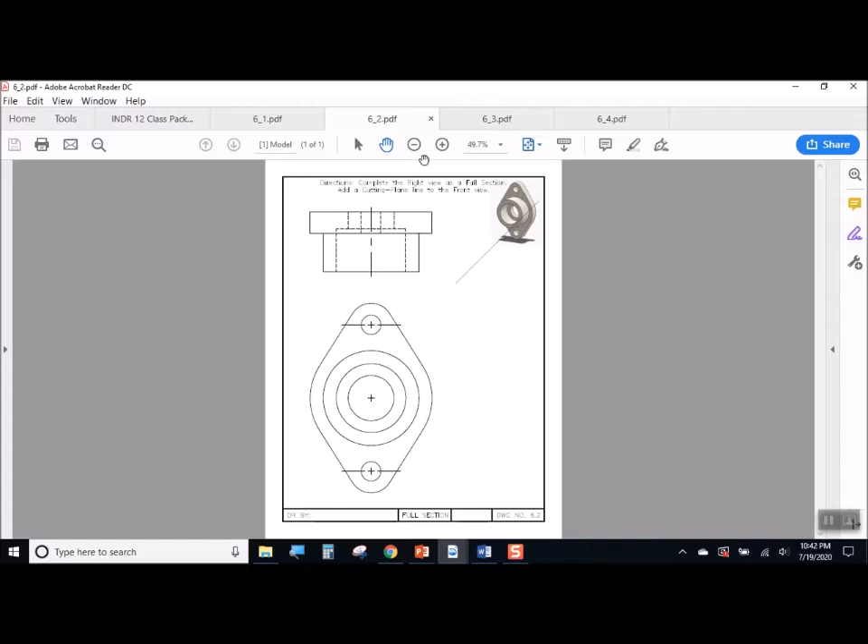So you take a look, here's our little 3D model in the corner. Here is the front view of this object. Here is the top view of the object. Here is a miter line to help you out. You're going to be projecting some lines from the front view over to the right. And you'll be projecting some lines from the top view over and down.

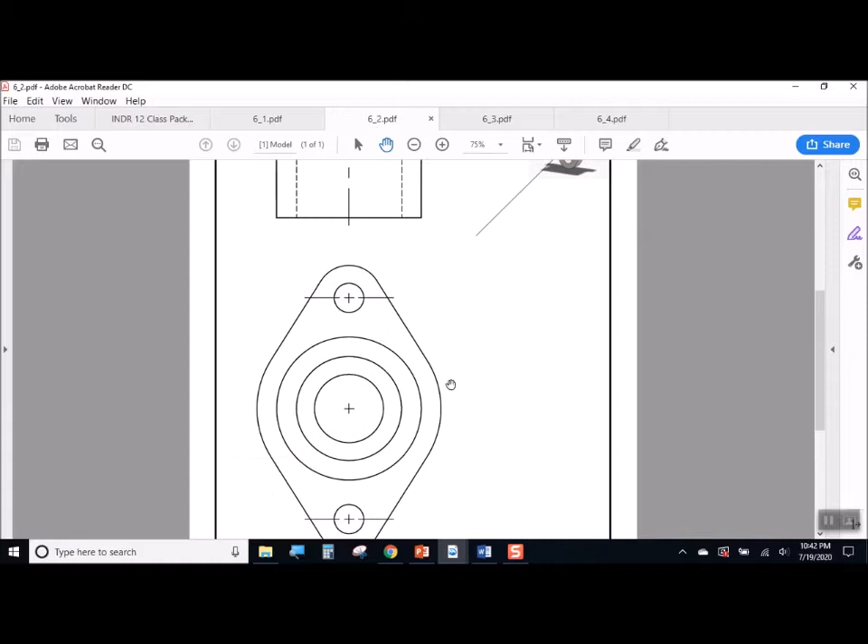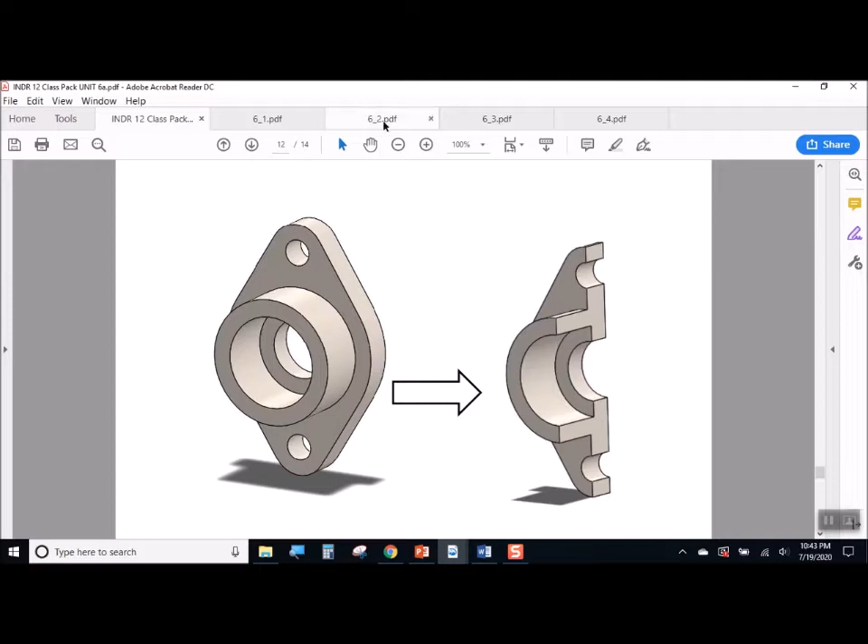Now, just as a caution to you, please don't project every single quadrant on every single circle and arc to the right. If you do that as your first step, you're going to wind up with a giant checkerboard over here. You're going to make a giant mess. So what you want to do is be selective. Think about the overall shape, the rough shape of what this thing looks like, and project over only the points that will give you that rough shape, the overall height.

And then this part here is a bump out, right? It's like a pipe that's been welded on to that teardrop shaped flange. Well, project the top of the pipe and the bottom of the pipe out, along with the top and the bottom of that base plate. Okay, when you get the basic shape of this object,

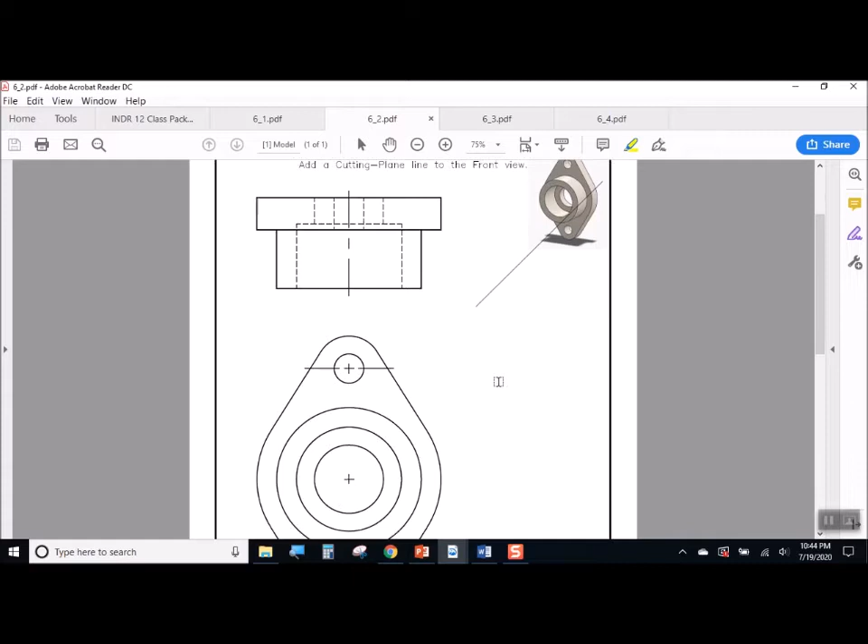you're in a much better position to start bringing over some of the details, like the holes going through the thin part, and the hole going into the pipe. And then we see there's a smaller hole in the back there going through that thinner part. Make sure all the corners in this top view get projected over and down so you know how deep the elements in that side view are going to be.

So the one thing we don't have is a cutting plane line. Make sure you add a cutting plane line and draw it correctly. Dark, dark, dark, heavy line using the pattern. 90-degree bends at the end and pointing in the direction that we're going to be looking after the imaginary cut is performed.

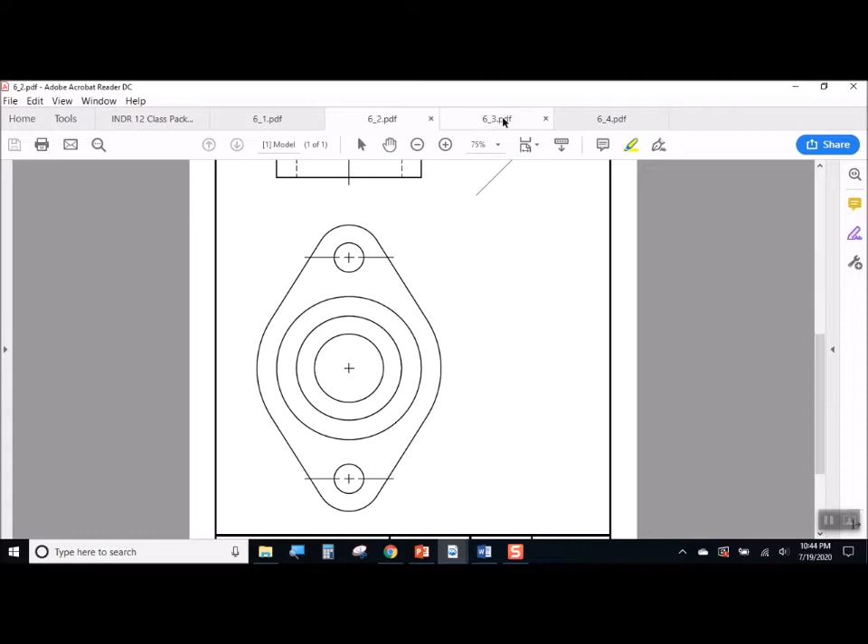Drawing 6.3 is a half section. We've got a cylindrical tube formed as part of this flange plate here. It's all one part though. The hole going through here, we see it's a small hole in the top, then it gets wider. So it's two different diameters. A big diameter just below the top surface, small diameter coming out of the pipe, and then here's our flange with these bolt holes going through it.

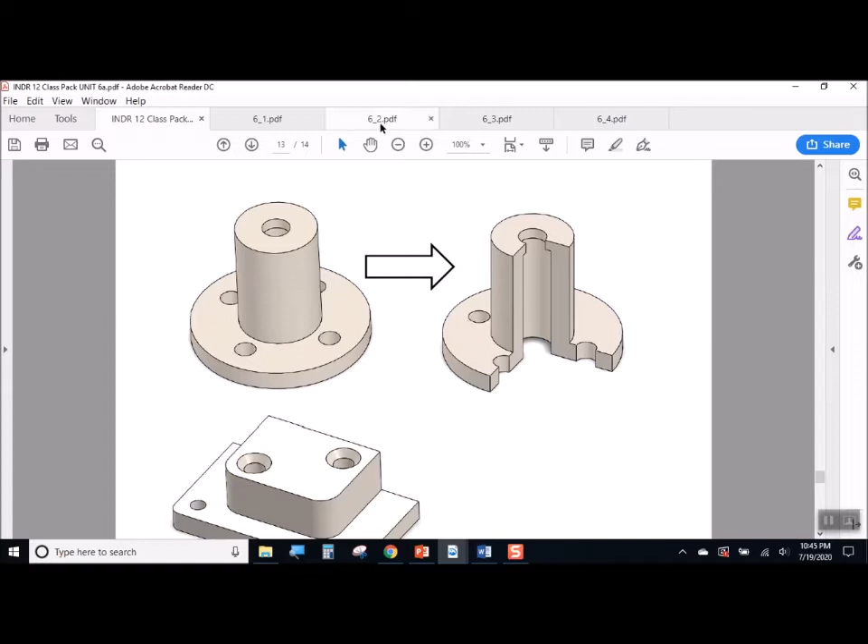So the idea is I want to create a half section. So to create that, you're going to be projecting over from the top down. You'll be projecting from the side over. And then keep in mind, only half of the view will be in section. The other half will just be what it looks like on the outside. There are hidden lines over here. There's nothing wrong with them over here, but remember, hidden lines do not go on a section drawing.

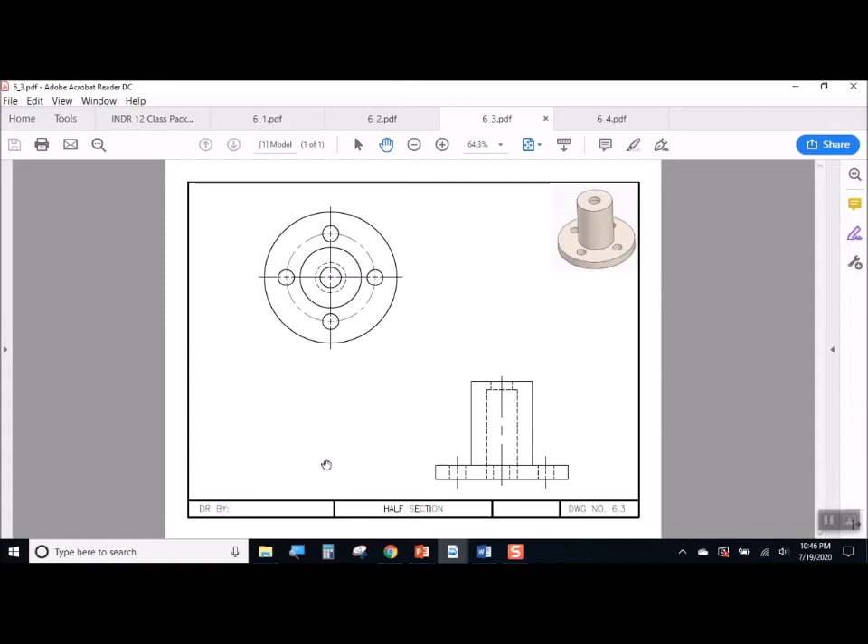Here's our drawing 6.4. It is an offset section. There are two countersunk holes and then two straight through holes. And the idea is I want to draw a front view that shows this part as an offset section. So again, there's a lot of stuff happening here. Rather than bringing down every quadrant on every circle, in every corner, just bring over the main points, the principal corners that will give you the overall shape of this thing. Bring them down from the top, bring them over from the right, and then rough in the shape of that front view.

When you've got it all roughed in, then you can start bringing down the holes and the countersinks, and then the through hole that goes with the countersink. And countersink just means a hole with a little bevel at the top, a chamfer at the top. So if you look over here, this is what they look like when they're drawn with hidden lines. When you make yours, they will look exactly like this, except they won't be hidden. They'll be with solid lines. Okay, but same 45-degree angle, same depth, just bring the points over, and then you can't go wrong.

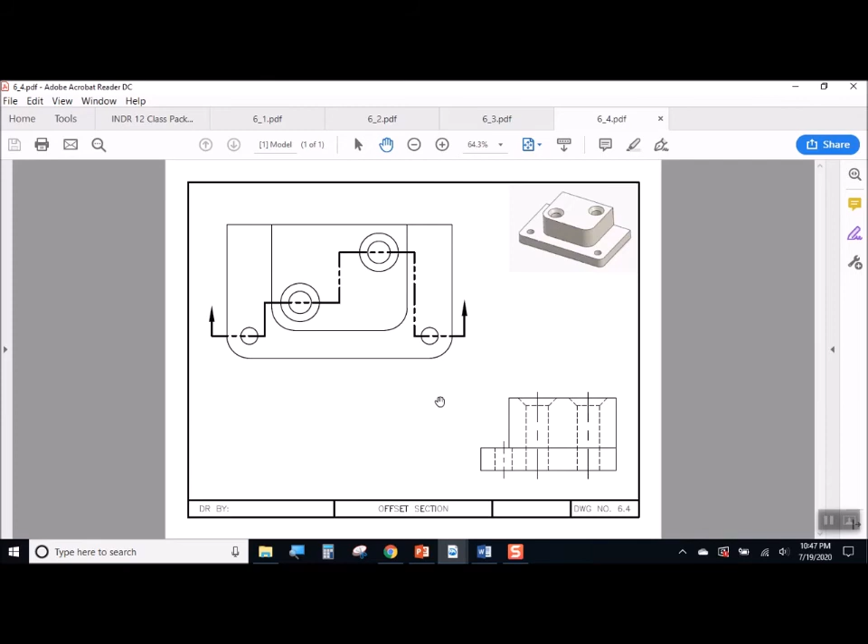And then a little reminder that we are not really cutting the part open, right? So this corner here, this corner here, this corner here, they will not appear as edges in your offset section because nothing's being cut. Okay? And if you can remember that, guess what? You are smarter than all of the 3D CAD modeling software out there. There's some very expensive, very cool, amazing 3D CAD software out there that can't do this correctly. It will put a corner every time you do an offset on your view that you're making. And hopefully someone figures out how to fix that someday, because that's just annoying.

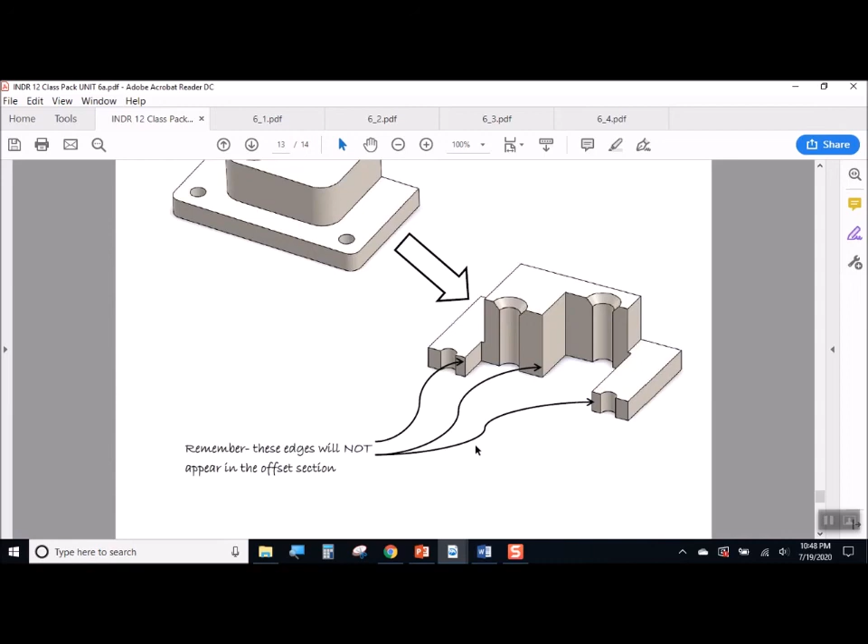Okay, so this is our discussion on section views. Why we use them, when we use them, 3 different types, and then how to execute them using your drawing tools, along with how to sketch them like we did earlier.